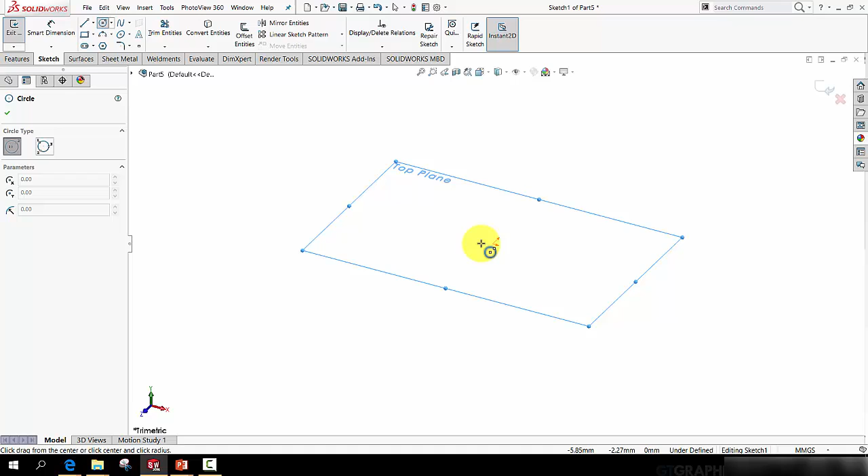So let's begin. Moving over to SolidWorks, we're going to begin with a sketch, and we'll select a circle and then we'll select the top plane on which to draw. I'll snap the first point onto the origin and draw a circle, then use the Smart Dimension tool to set that to be diameter 80 millimeters.

This blue icon will close the sketch. We've now created our first sketch.

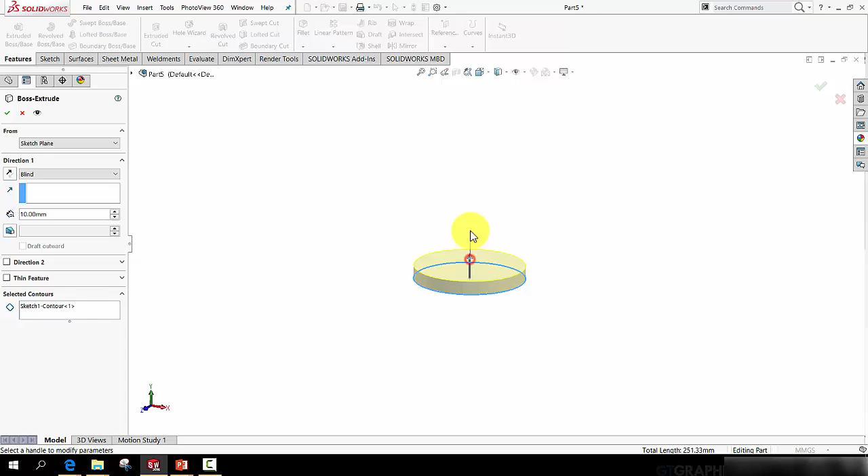Once we have a sketch, we can do something to it, and that something usually takes the form of a feature. So let's activate the Features tab, and we want the Extruded Boss Base feature, which will pull a 2D profile into a 3D solid. I can drag the arrow here in the graphics window, or for precision, I'm going to type in a value of 100 and press the green tick to approve that feature.

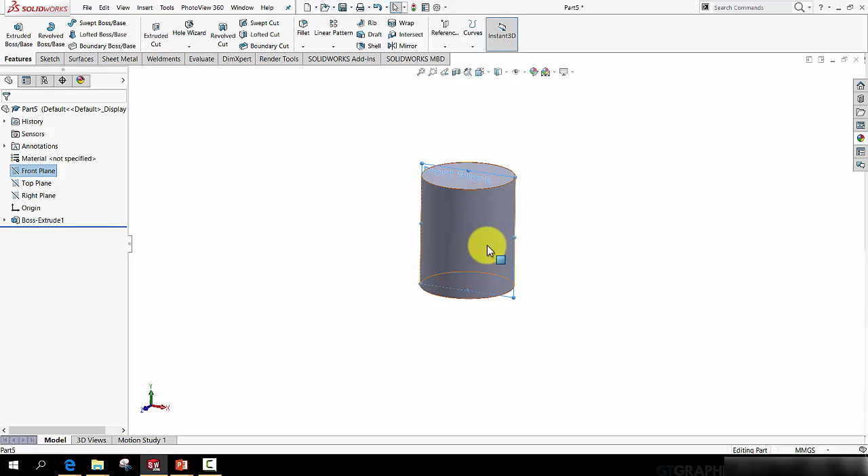So what I want to do now is click front plane or right plane. I'll use front plane, and you can see that perfectly bisects the cylinder. So with the front plane selected, hit spacebar and hit this Normal To. That'll bring me to a view in which I can look 90 degrees to that plane.

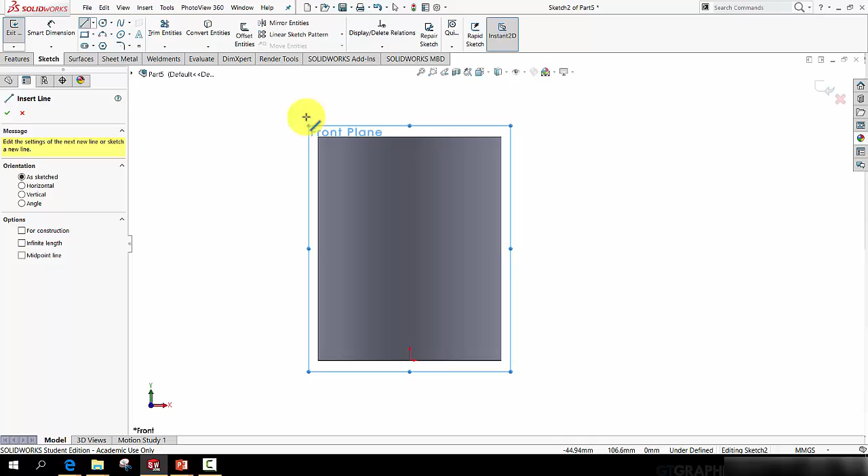So I'm going to start another sketch, click sketch and click a line. Because I already had the front plane selected, it has started this new sketch on the front plane. I'll start the first line somewhere here, making sure I see that little white icon appearing, showing that it's directly above, vertically aligned with the red origin. So click and then go across horizontally and click again.

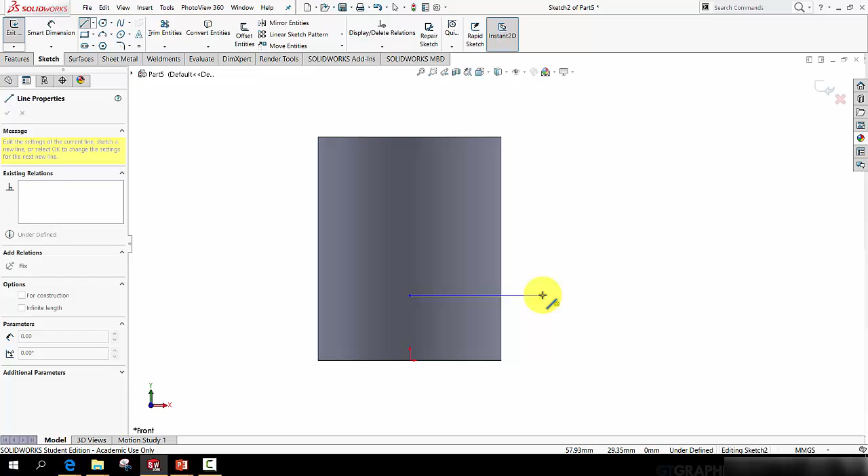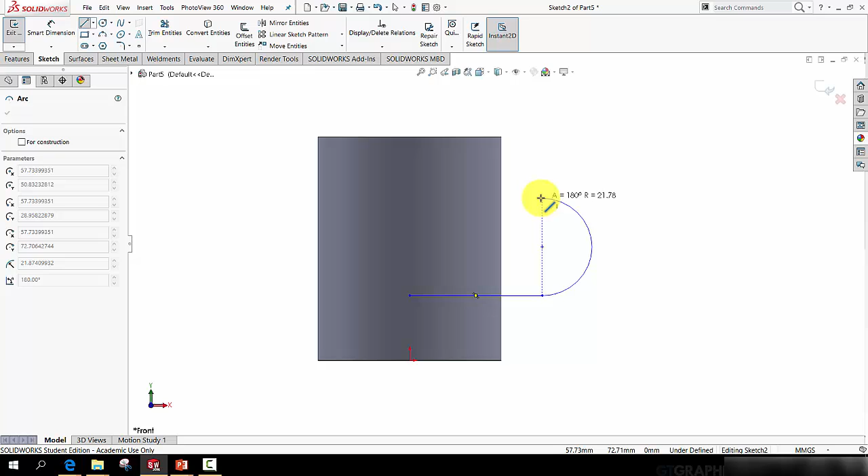I want an arc, a 3-point arc here, and I could close the line command and open the 3-point arc command. But a shortcut is, rather than clicking this line, hover back over the point, wait a moment, and then move the mouse away in the shape of an arc. Sometimes if you're a little off, you may get an arc in the wrong quadrant or going in the wrong direction, so just hover back over the point and try again. Make sure you get that dotted line showing it's going to snap onto vertical alignment and give you a true semicircle. So click and draw this line back to the center.

So let's add a smart dimension from this point to that point, and let's say that's going to be 30, and between this point and that point will be 40. In fact, that's a bit small, let's make that 50. So to edit the dimension, I just double clicked it and changed the value.

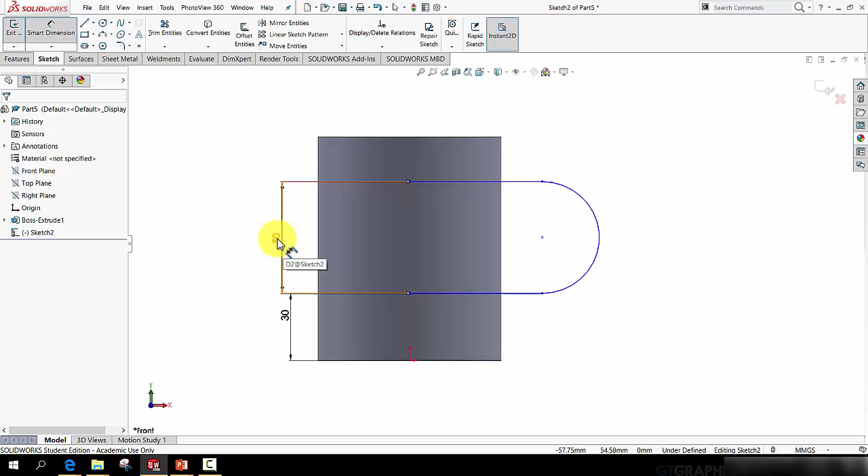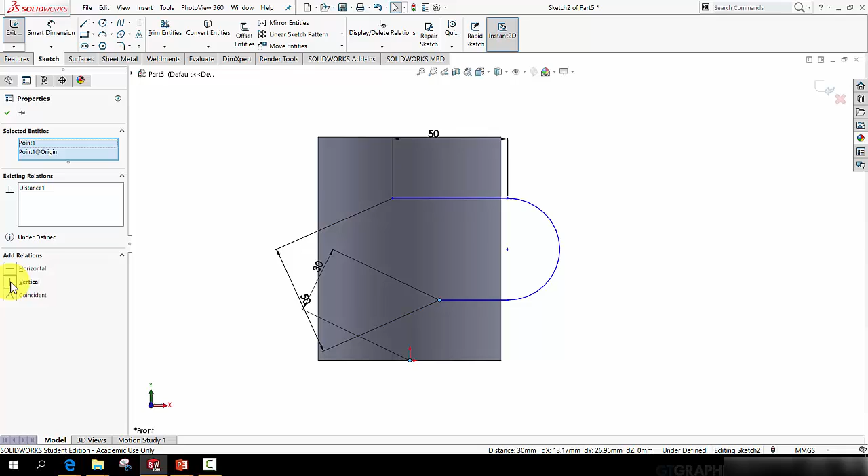Let's tell this line also to be 50, and now I want the sketch to be fully defined, and I actually don't know why it's not fully defined yet. So the test is, if I pick a point that's blue and drag it, how it moves shows me the freedom it has, and the freedom this point has is simply that it's not actually locked into vertical alignment with the origin. So to fix that, let's hold Control, select the origin, and select this point, and add a vertical constraint.

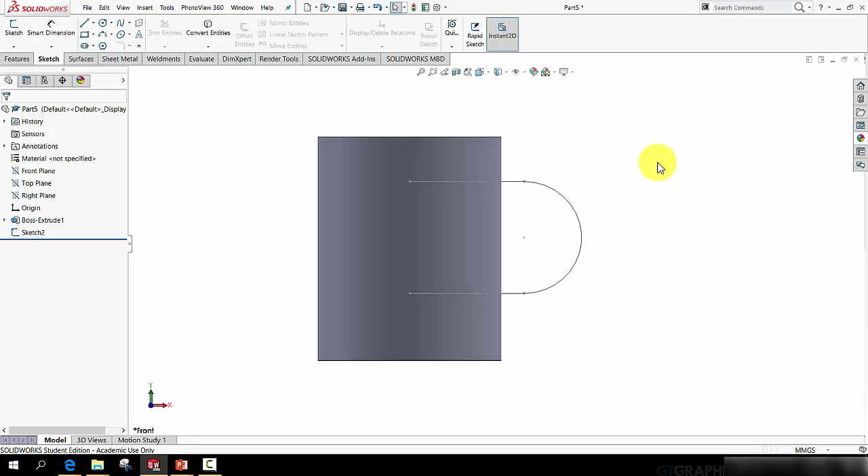Let's do the same thing with this point. Hold Control, select this point and that point, and add another vertical constraint. So a number of things happen: the geometry itself turns black, and also down at the bottom it says fully defined. So let's close that sketch and rotate it just to see what it looks like.

To generate a feature called a sweep feature, we'll take a profile, a shape, and sweep it along this path to generate a solid. To do that, I need to draw on the right plane.

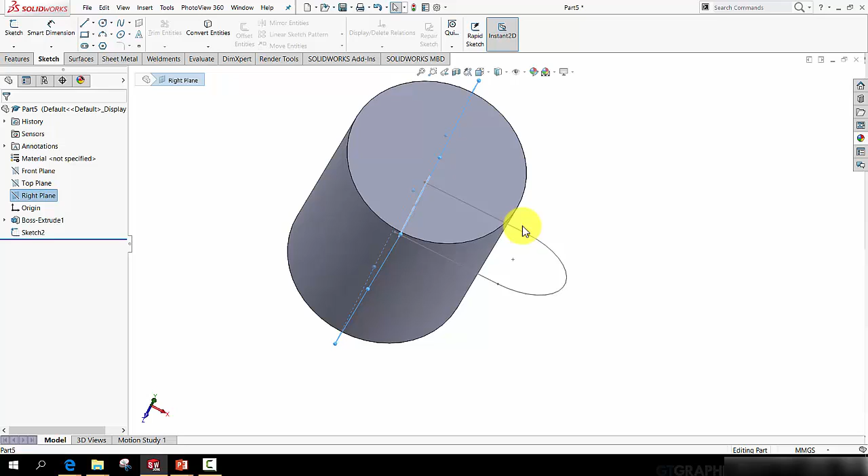By drawing on the right plane, I can neatly draw where this line and this point begin. I'll hit the space bar, normal to. If it's a little difficult to see, you can change the view style or display style to shaded with hidden edges for a moment.

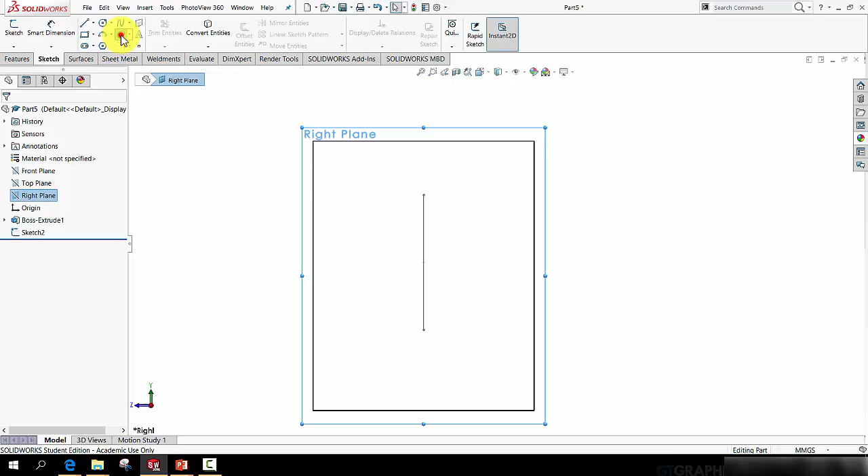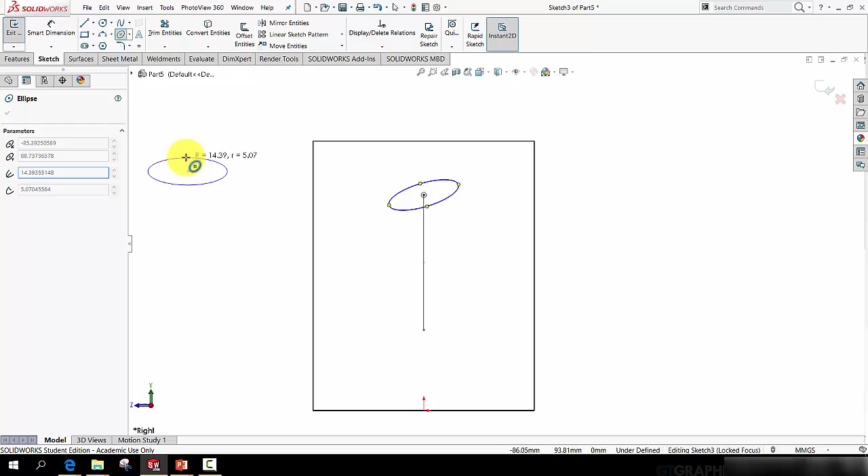I'm going to draw an ellipse, starting at the center and moving out to the right. I always draw the ellipse on purpose at a slight angle. So 3 clicks to draw the ellipse: the first click positions the center, the next click positions one of the extremities, and the third and final click draws the final extremity. Let's just delete that one, that was practice.

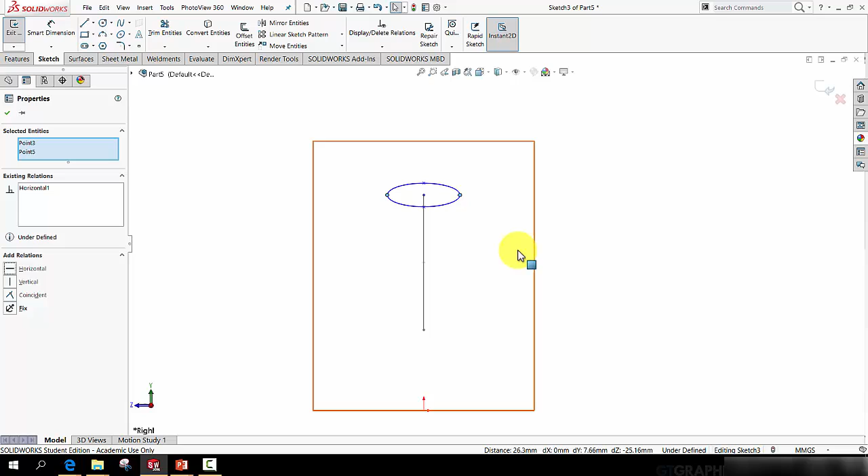The reason I draw it at an angle is the ellipse doesn't actually lock on to vertical or horizontal alignment when you draw it. I draw it at an angle because it forces me to hold control, pick that point to the left, that point to the right, and hit horizontal. It reminds me to set it to being horizontal.

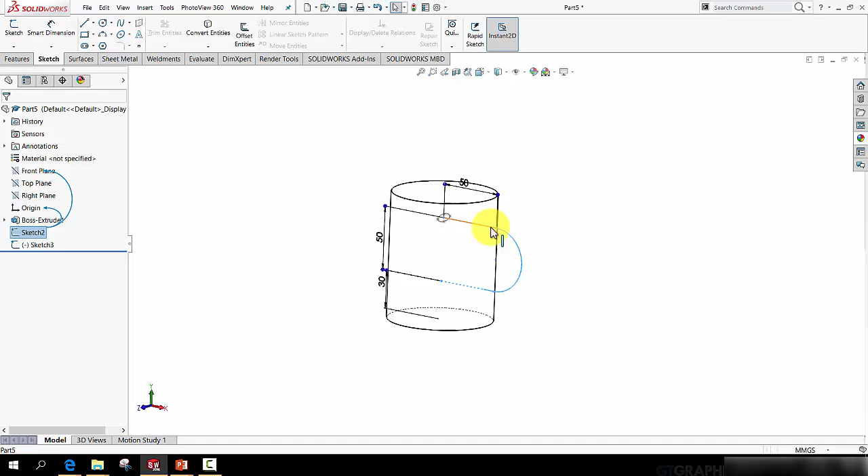To smart dimension that, I need to pick the 2 points, and let's tell that to be maybe 15. And let's tell the overall height to be about 6 mm. And close the sketch. It's important that both of those are 2 separate sketches: one sketch is this path, the other sketch is the closed loop, the profile.

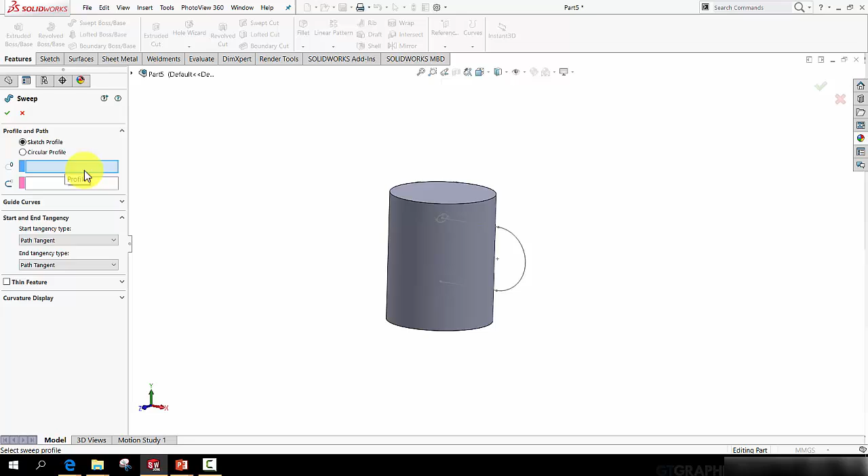Let's turn back on this shaded view, and go to Features, Swept Boss Base. Whatever's highlighted in blue is what the computer needs, so if I hover over it, it says Profile. I'll select that ellipse, the profile. Now the pink path selection window has become highlighted, so let's select the path, and it should make the solid for us.

So I see that's a little bit skimpy, I should have actually made that thicker. To edit this, I want to edit the sweep. The sweep has a little arrow beside it. When you expand that, you can see both sketches, and at any time you can edit either of those.

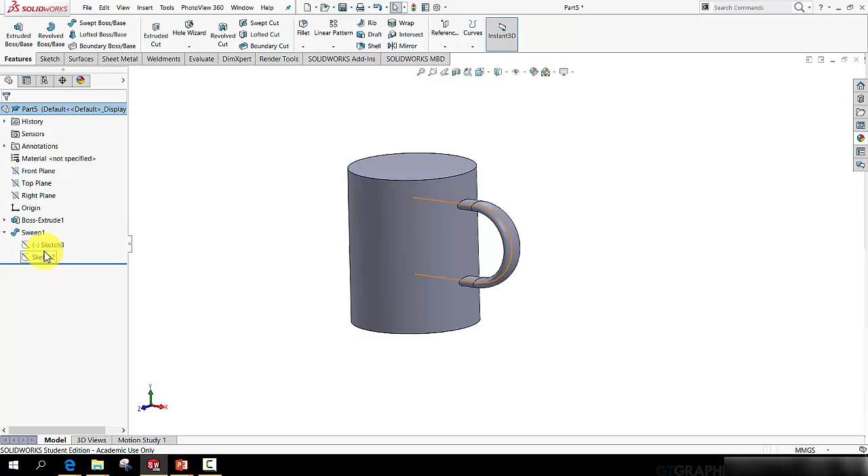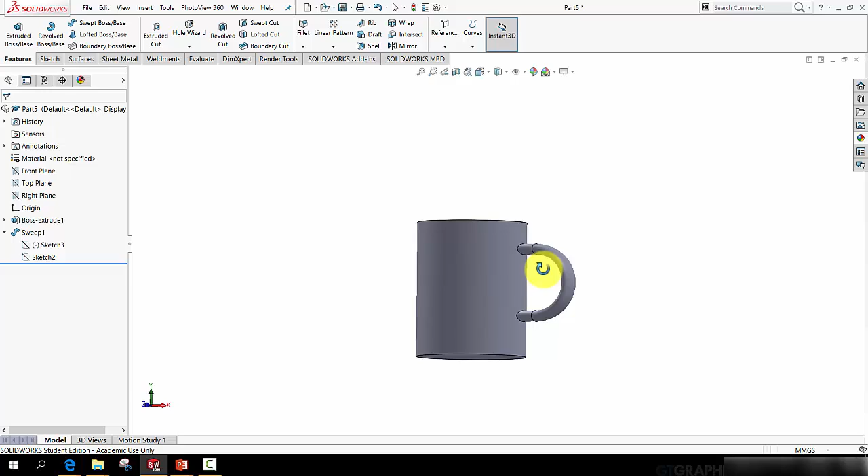I want to edit the ellipse, so let's right click it and select Edit Sketch. I simply want to double click the 15 and make that 20, and double click the 6 and hit 8, depending on your computer. Whenever you've made the change, press the close sketch icon, and now you can see the feature will be updated.

So to finish this off, let's put a fillet of approximately 2 mm at the joint between the handle and the mug there and there.

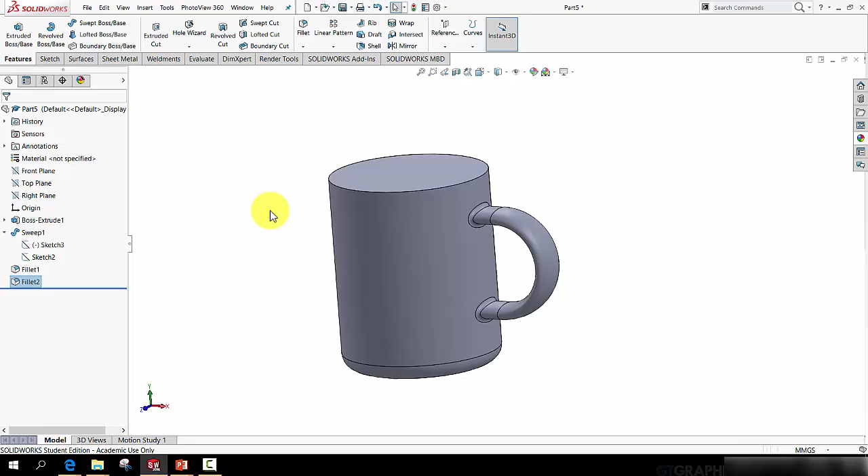Let's add another fillet of say 10 mm to the base of the cup. Looks a little big, so I'll just change that to 8 mm. That's better. There's a number of different ways of hollowing out this cup.

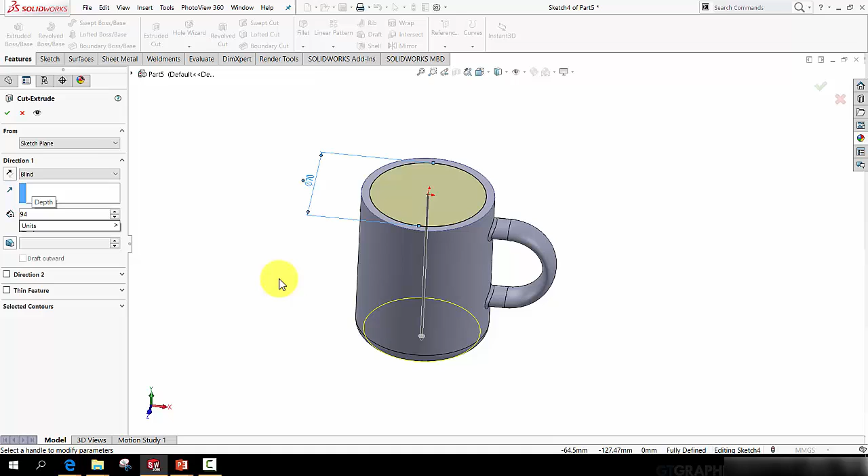We could use the shell feature, but in this case I'm going to hit Sketch, Circle, and click the top surface. I'm going to draw another circle on that top surface. Smart Dimension, and tell that to be a value of 70. And Features, Extruded Cut, and tell that to cut down a value of 94. Green tick.

There you have it. So we'll also add a fillet on the inside. Let's leave that also at 8 mm. But at the top of the mouthpiece, let's add a full round fillet.

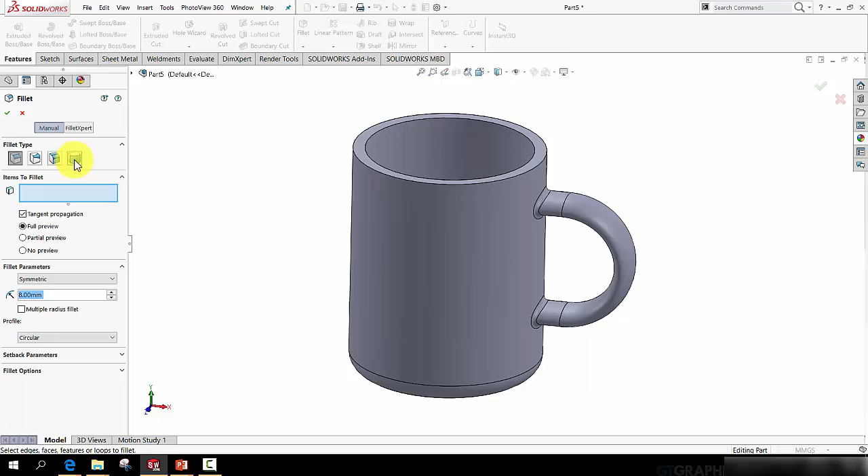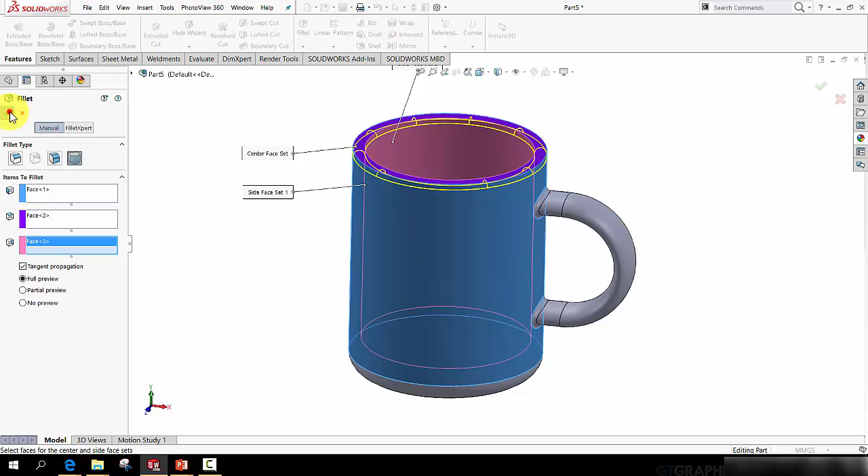To do that, still call up the fillet command, but activate the 4th type of fillet, a full round fillet. There are 3 boxes you must populate with information. The first one represents the outer face, so click the outer face. Then activate the middle box and select this top middle face. Then activate the bottom box and select the inside of the cup. Press the green tick, and there you have a full round fillet.

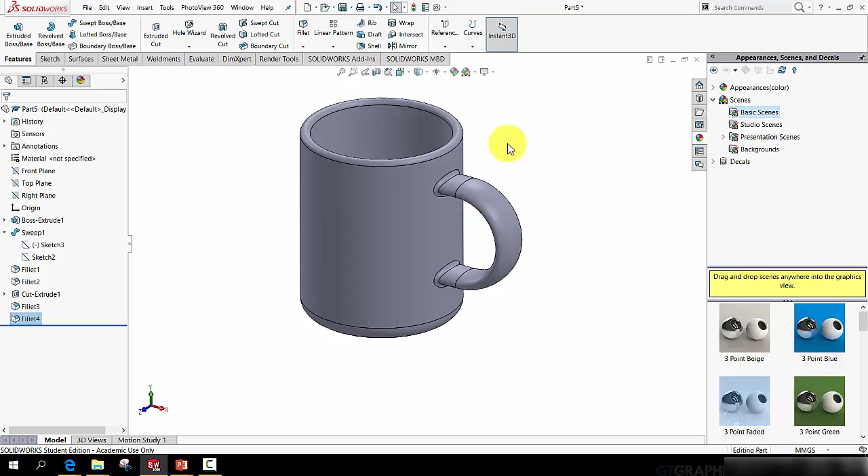Now finally, to add some material appearances and a decal, turn on the Appearances, Scenes and Decals tab, and press the push pin to make sure it stays there. It's worth experimenting with the appearances.

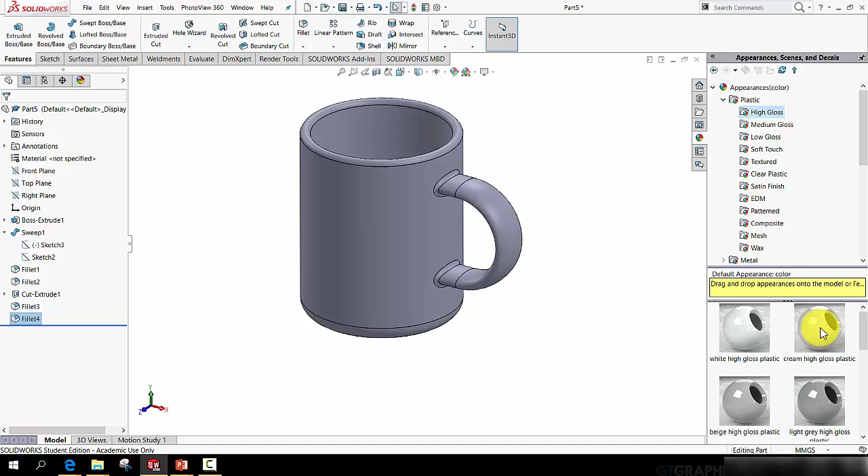Sometimes you could actually find that a different material looks more like the material you're after. So in this case, to generate the appearance of bone china, I actually applied a high gloss plastic. Select Appearances, Plastic, High Gloss Plastic, and I use this cream high gloss plastic. Click and hold, drag it and drop it onto the cup, then move this across until you see part 5 in my case. Now we've applied a material appearance of cream high gloss plastic to this cup.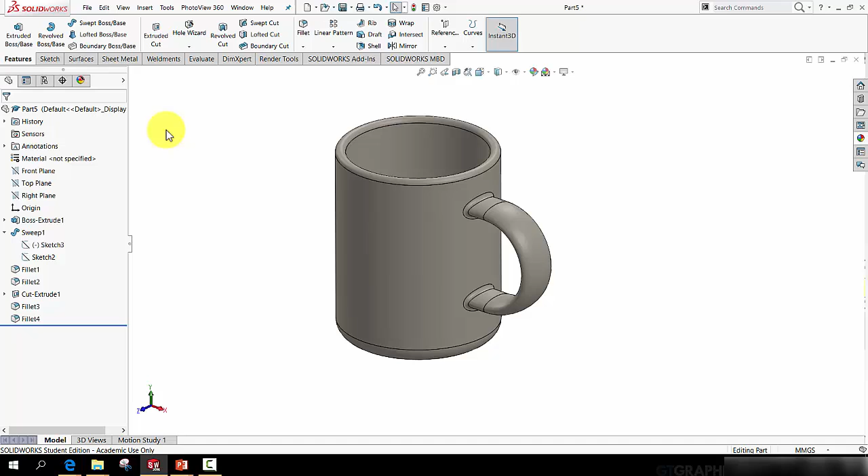Now back in SolidWorks, there's a number of different ways to add the decal. The way I prefer is to go to Render Tools, then Edit Decal. If you do not have Render Tools, go to Tools, then down at the very bottom Add-ins, and tick the box beside PhotoView 360. That should bring up the Render Tools tab.

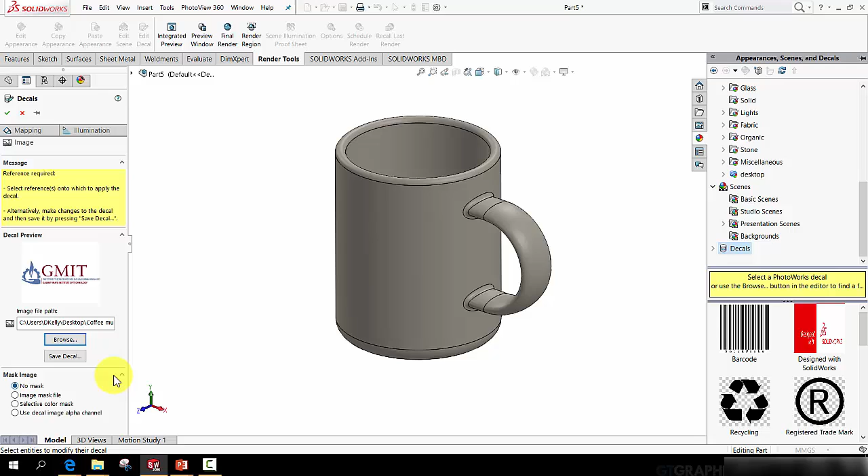Then you can go to Edit Decal, browse for the image you're after, then click the face you want to put it onto. In my case, the curved portion of the coffee cup.

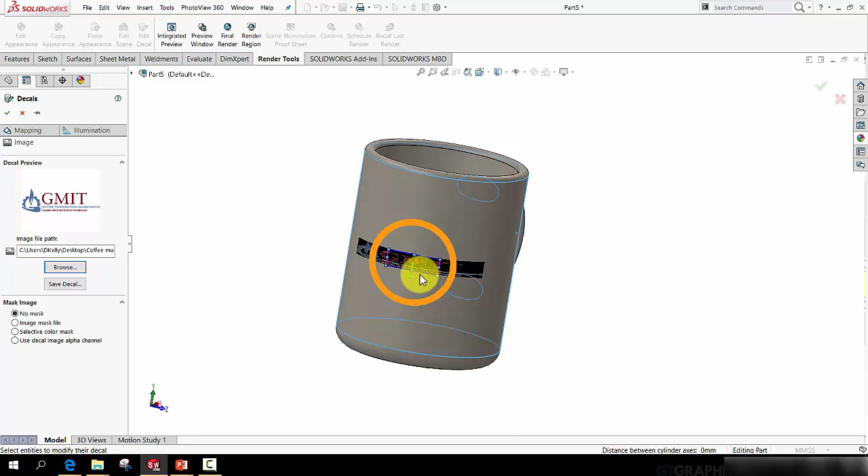So you've got some edits you can make here. If you drag the corner, you can make the image bigger or smaller. If you rotate this orange or blue band, you can rotate the image and its alignment. Or if you want to move it, simply click anywhere within this frame. I know the background is black there, but if you press this, use Decal Image Alpha Channel, it becomes clear.

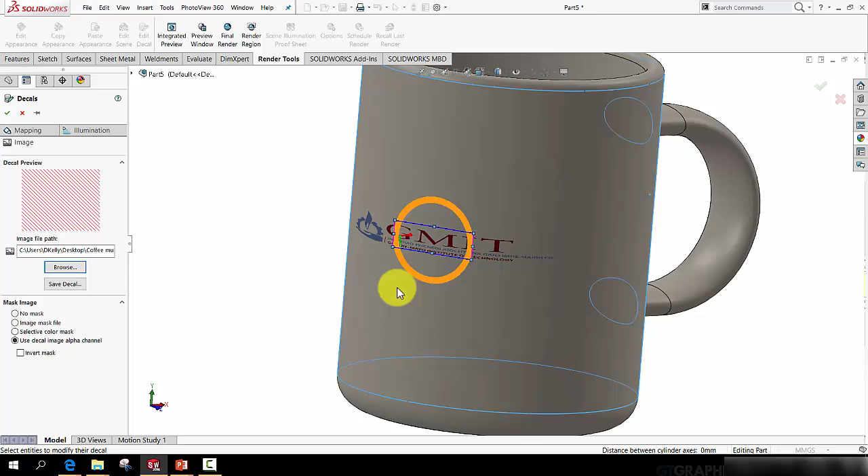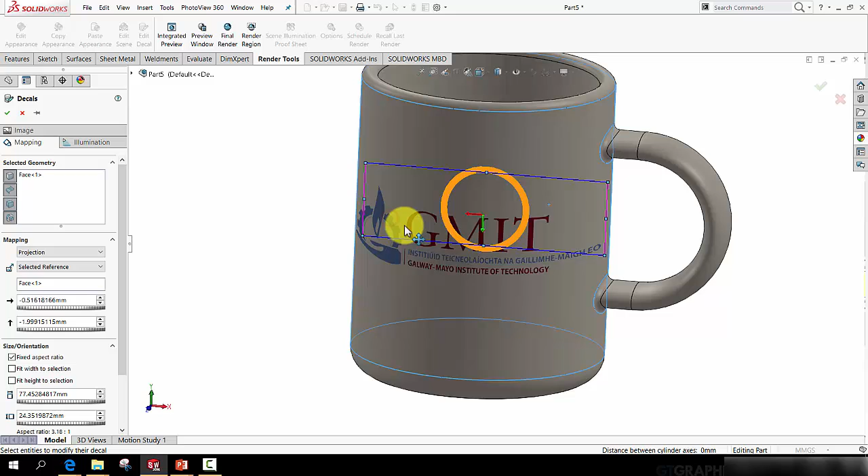Depending on the image you have, its quality and size, you get a much better or worse decal. I'm not 100% happy with this one, because it's tending to wrap around the surface of the cup a little too much, not that realistic. So what you can do is go to Mapping and change it from cylindrical to projection. In that case you get a different type of application that doesn't bend or rotate around the cup as much. There's all sorts of different options you can change in here, but for now I'm happy with that.

So position it where I want it, press the green tick, and let's apply the final render and see what happens.